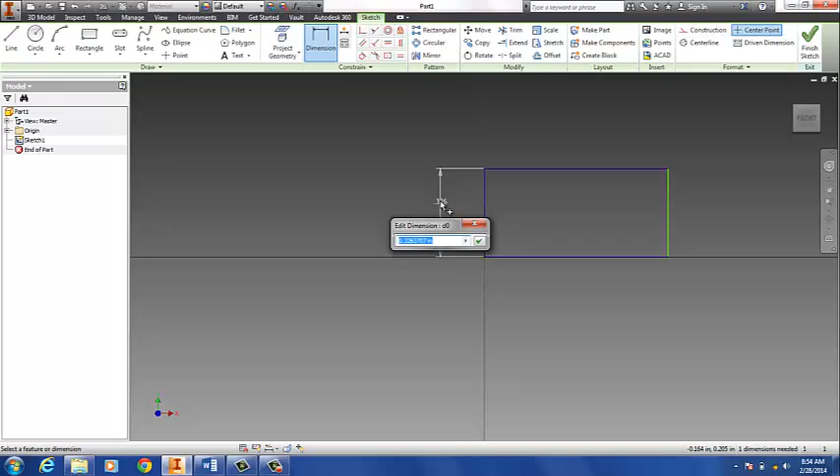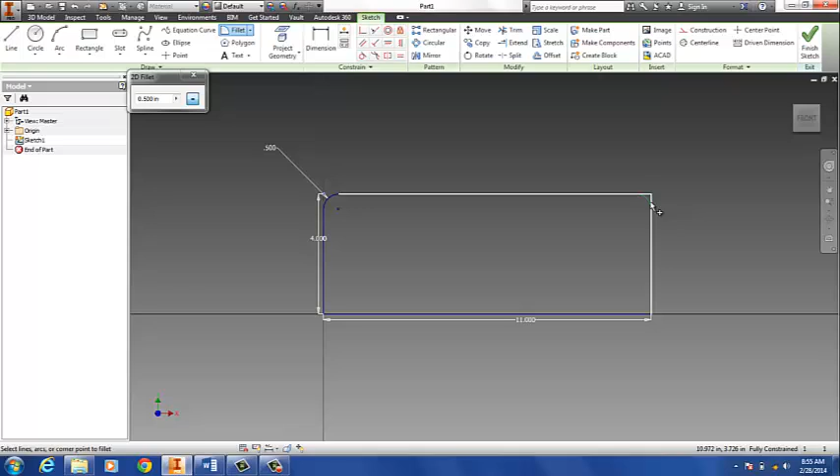Alright, we've got fillets of 0.5 on the corners. And then that gets extruded to a depth of 0.5.

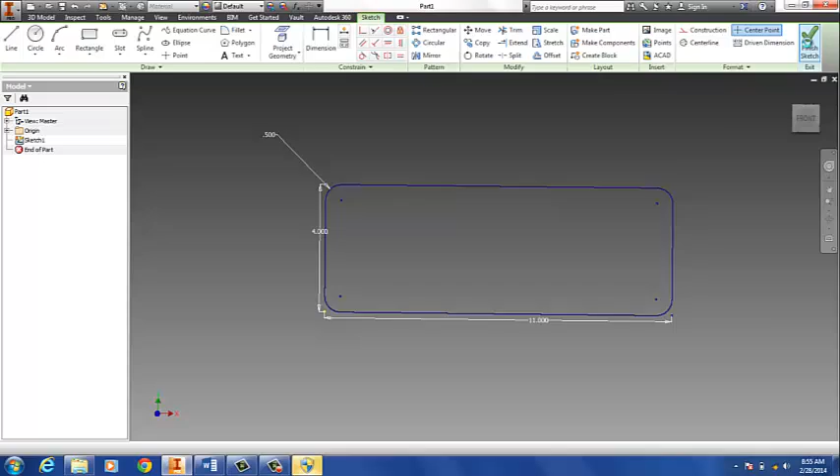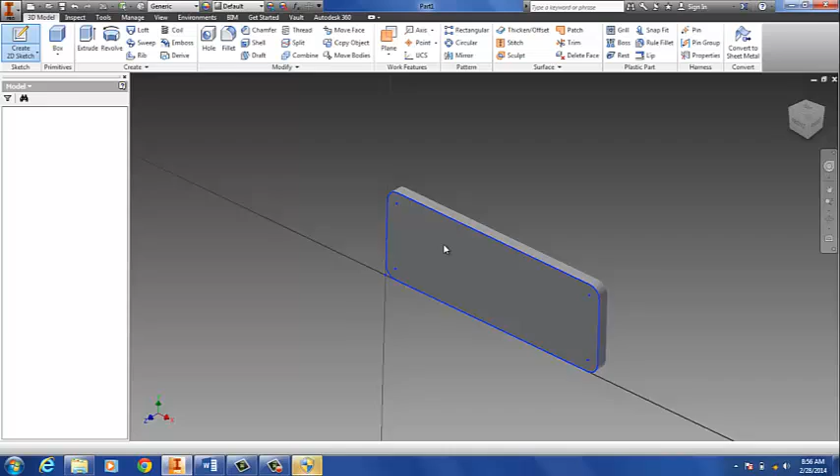Alright, the next thing we'll do is we'll put these 4 points down to make holes on the corner. It's not as easy to verify where they are. Alright, but you can see here the center aligns with the edge of the fillet. So we're going to just make it a 0.5 going in on each side. Okay, and in fact that's what this center represents here. So actually the easiest way to do that is to just put points right on top of that.

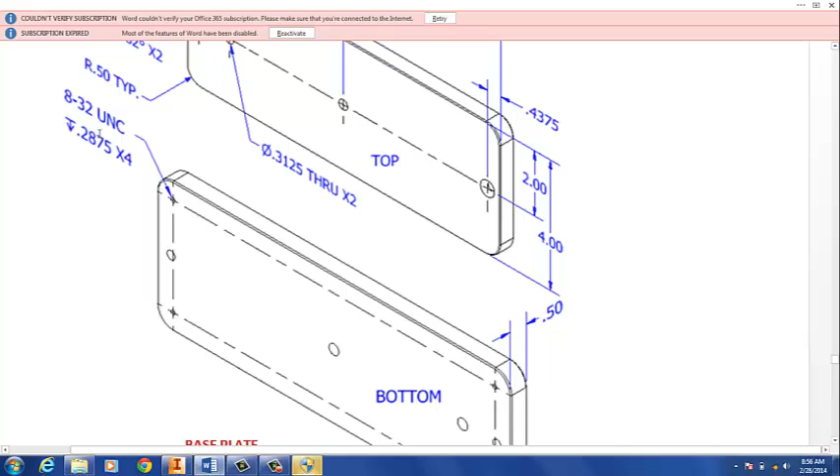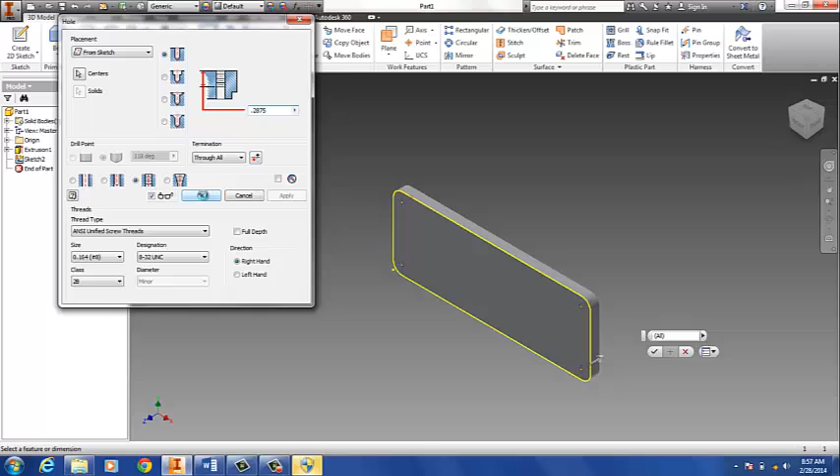We'll select holes. It's a tapped hole. Alright, and now the hole note is 8-32 UNC with a depth of 0.2875 times 4 because there's 4 holes. Alright, so if we scroll up here, we'll see the number 8 corresponds to a size of 0.164. There's our 8-32. We just need to get the depth now. 0.2875. Alright, and that's just a tiny small hole there, but that does go on there.

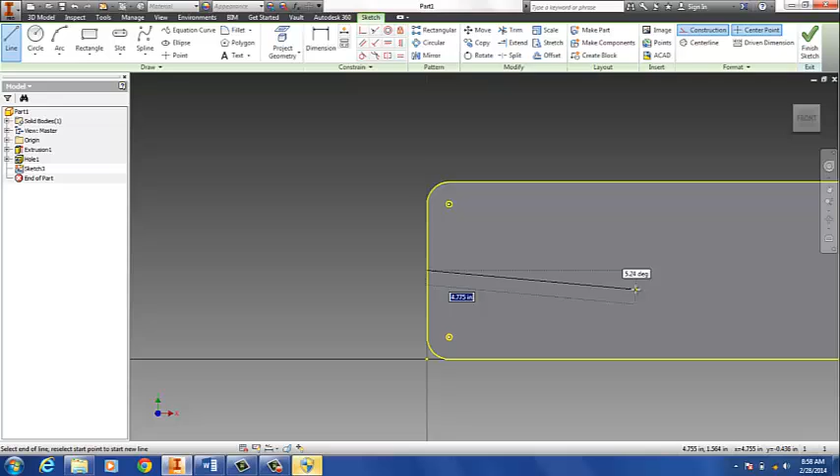We have another series of holes, actually these 4 along the midline here. Well, let's start by locating that midline. I'm going to do this with the construction line, and it will snap to the midpoint of a line, so there you can see we get a green dot. That's the midpoint there. And I'll find it over there as well. Alright, we'll turn that off. The first thing we want to do is put a point down on that line. Alright, and let's dimension that point. It should be 0.4375 over.

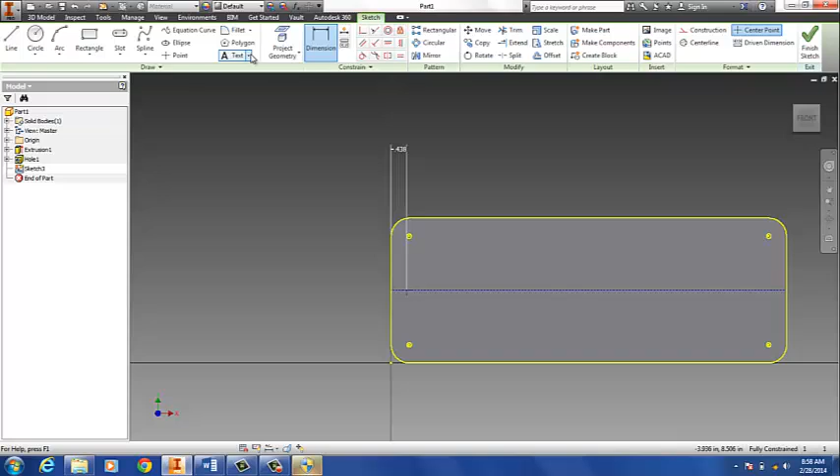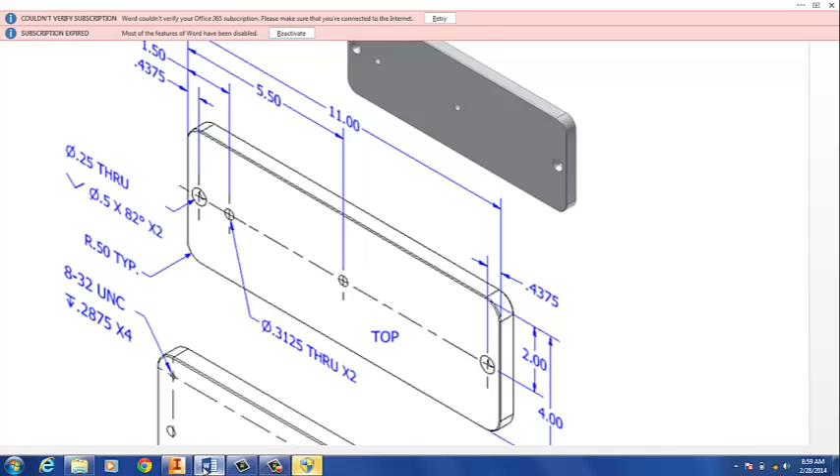Okay, and then what I'm going to do is do a rectangular pattern of that point in this direction. Switch it the other way. I want a total of 3, and the spacing between each is 5.5. Nope, it's 5.5 back to the edge, so let me undo that. Let's try this again.

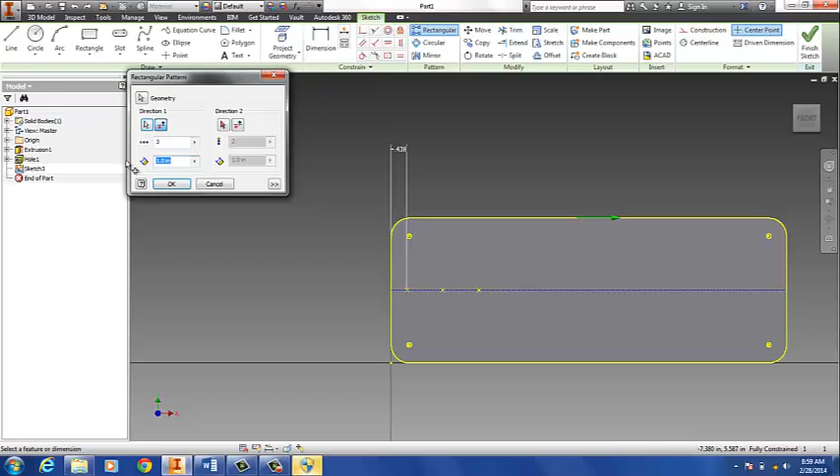Rectangular pattern of this direction. Switch it, total of 3. And I want the spacing to be 5.5 minus 0.4375. Alright, then it does the math and calculates where those ones go. Alright, we have one more point to put down. That's also somewhere on our line here. And that one is 1.5 inches over.

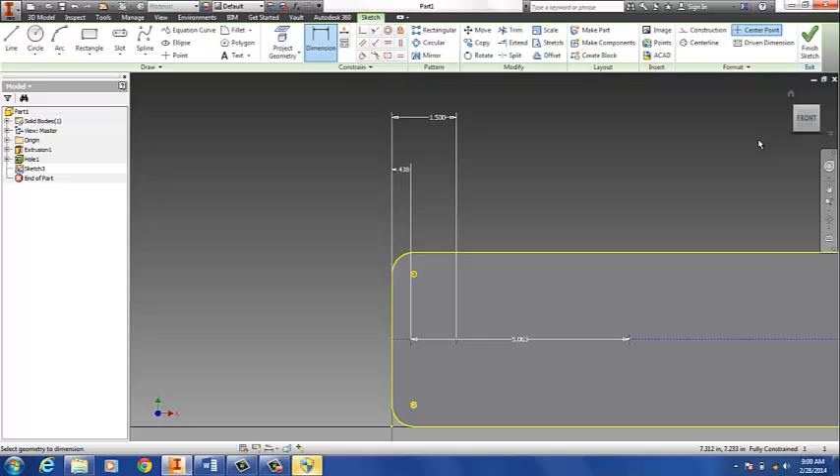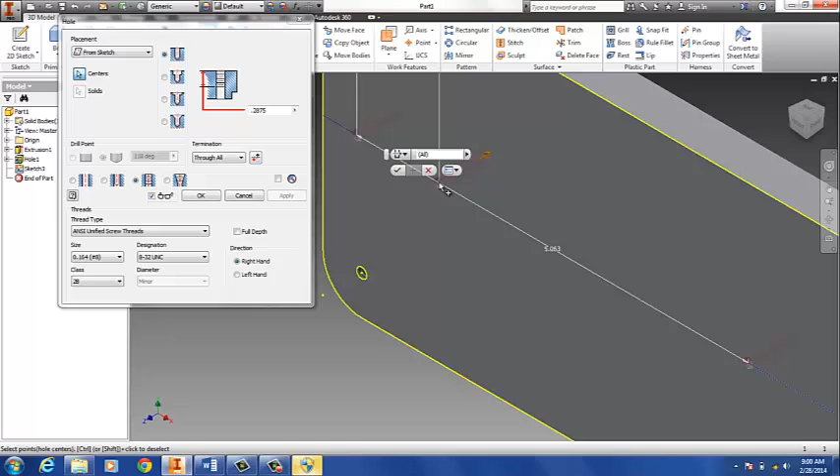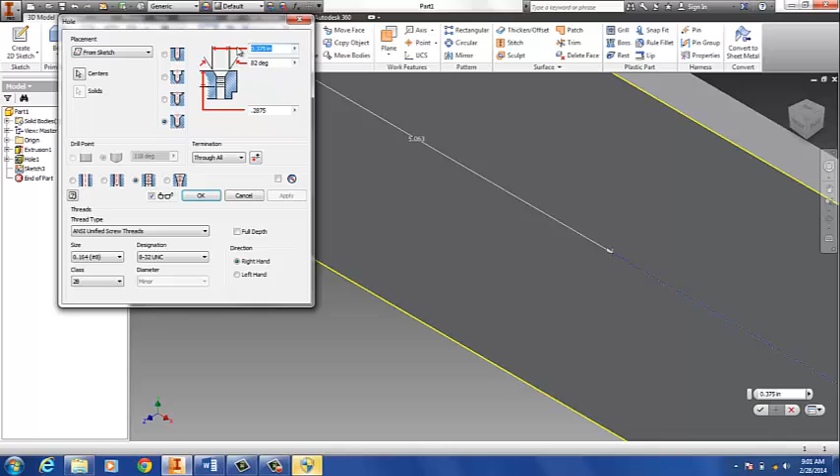Alright, do a hole. I'm going to deselect those two holes. So I'm just doing the two on the outside. They're countersink 0.25 through, 0.5 on the countersink, 82 degrees. So 0.5, and this is 0.25. We just make sure we've got both of them. We do. Say OK.

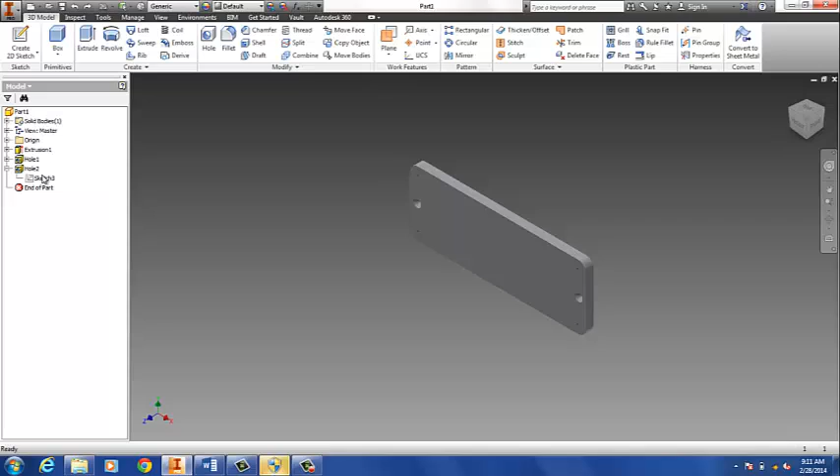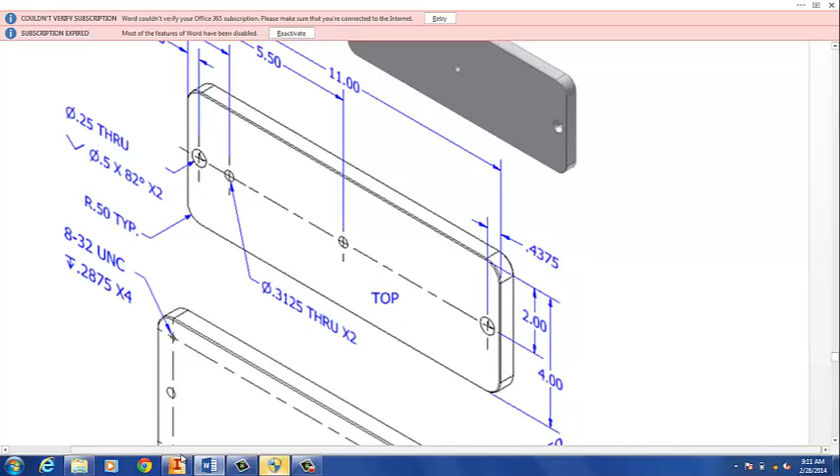Okay, so the next thing we need to do is put those last two holes down. We've already placed locations for them. So what I'm going to do is take that sketch we've done, which has been consumed. I'm going to right click on it and share the sketch. All right, and that will make those points available to us again. So if we select hole, it finds those 2 points. These are just 0.3125 all the way through. Okay, that takes care of the last two holes.

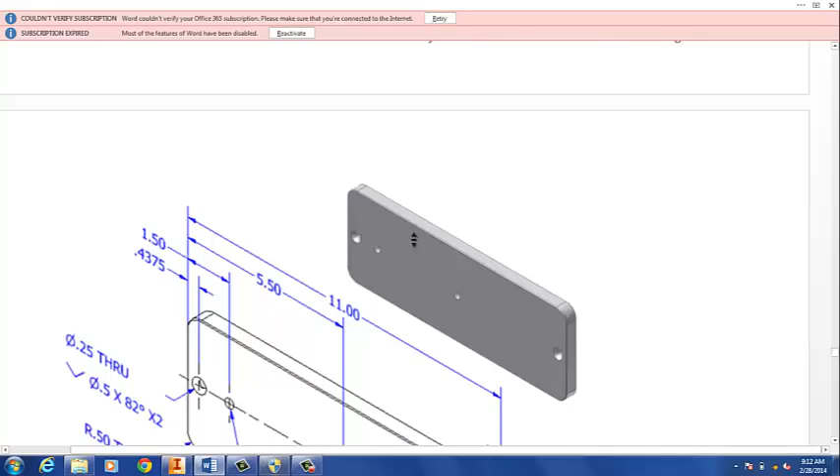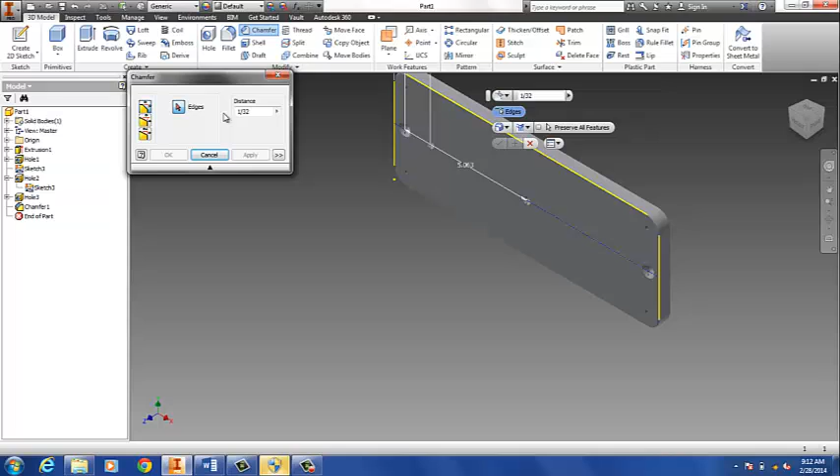The last feature we need to put on here is a chamfer, which is described up here. 1/32 inch chamfer to all the exterior edges. And we're done.